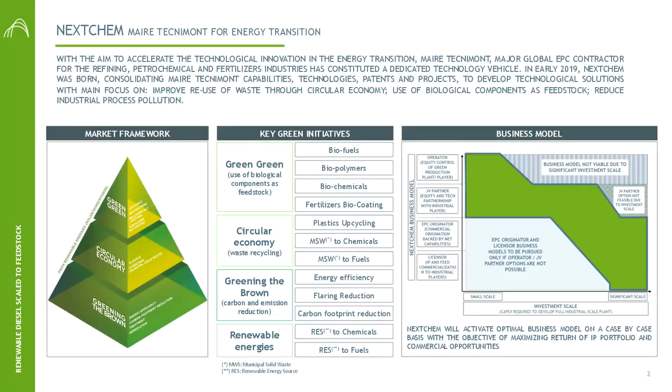The second cluster is the circular economy. We have a technology solution for plastic recycling and municipal solid waste conversion to chemicals and fuels. The third cluster, concerning the discussion today, is focusing on creating value from biological feedstock. In this field, we have a solution in biofuel, and for sure, renewable diesel is the solution that we propose today to this audience. Maybe Adam, you will go ahead with presenting Saola and our partnership, please.

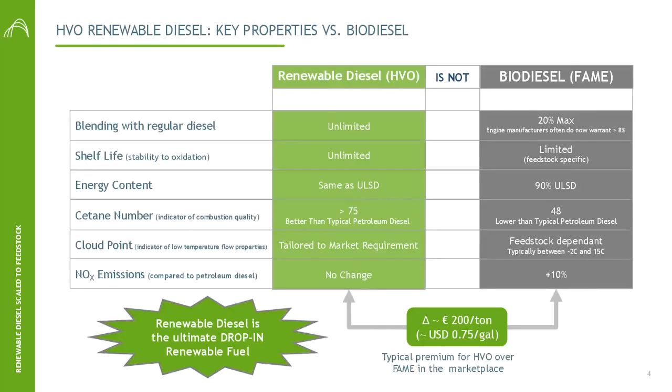In the U.S., there are programs that are supporting renewable diesel production, as well as other biofuels in general, but specifically renewable diesel has one of the lowest CI scores in the biofuels section for LCFS. We talked a little bit earlier about biodiesel versus renewable diesel. That gap can be up to $1 per gallon between the two fuels.

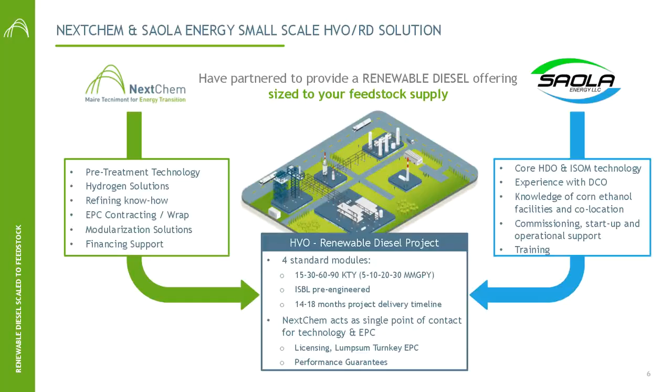NextChem provides some of their technology around pretreatment as well as SMR, and on the Saola side we provide more of the core HDO and ISOM technologies. With that combined under the NextChem umbrella for project delivery, we can offer customers an easy approach to execute a project, get off the ground and start generating revenue. With that said, Valerio will cover what makes our model work in the bioeconomy on the next slide.

Thank you, Adam. A lot of people in this webinar are used to thinking with an oil and gas mindset. And at the beginning, this business of renewable diesel has also been very much impacted by this, pass me the word, old approach.

In fact, all of us who worked in the petrochemical field before have experienced the fact that large-scale facilities enjoy better economics. The capital cost per installed ton is lower. When you ask your supplier for more feedstock, normally you receive a better price. But this is not the case when you are working in the biofield.

In fact, when you want to aggregate biofeedstock, you are suffering this diseconomy of supply. So basically, the more feedstock you want, the more you need to collect from a large area, a large geography. Cost of logistics impacts drastically the economics of the project. So what we did, after having analyzed carefully these dynamics, is arrive at the conclusion that there is an optimum scale for implementing this technology.

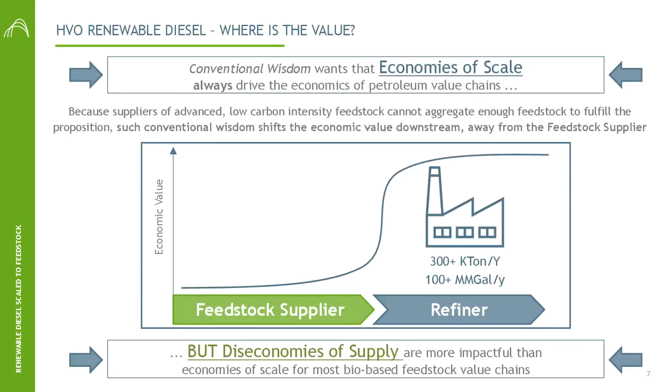If you may go, Jim, to the next slide. The reality is that by implementing this approach, we have feedstock costs that are drastically lower. In parallel, and this is also thanks to the strong coordination and activities that Saola and NextChem made together, we enter into the market with a modularized, standardized solution. This gives us the possibility to enjoy both an efficient feedstock approach, with also a very reduced capital cost because our technology is deployed in a very efficient solution that is the

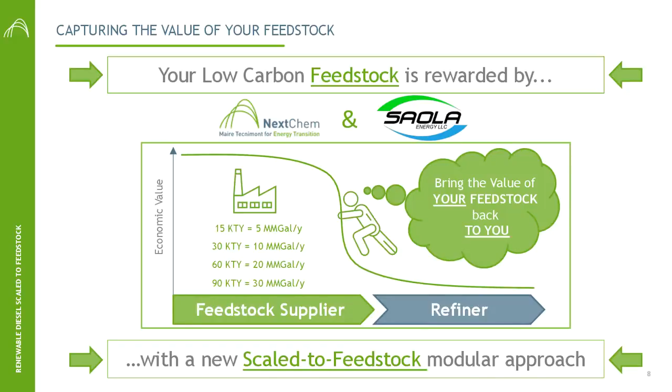modularized and standardized approach. In parallel, thanks to the fact that we can work with a lower amount of feedstock, we select the feedstock in order to have advanced feedstock at the inlet of our technology, and this gives us the possibility to have a very low carbon intensity on our final product. Please, Jim, if you may go to the next slide.

This is summarized at the end with this list of feedstock that we may utilize in our technology. For sure, we go to feedstock that are classified as second generation, following the RED 2, or advanced, following the classification in the United States. In parallel, our technology, thanks to the fact that we have a very efficient approach for the pre-treatment of the raw material, gives us the possibility to have a quite wide blend of product. So we are extremely flexible in terms of selection of the raw material.

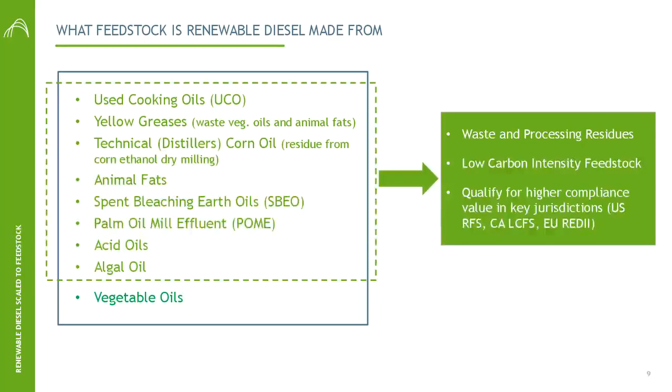And also our pre-treatment technology gives us the possibility to have a very low demand in terms of hydrogen. And this for sure is helping in optimizing the economics of our plant. This technology for sure has been deployed. So this technology exists on the ground, it's not just an idea that we have in our minds. And in this regard, maybe we can go to the next slide. I may introduce you briefly to the very high level process flow diagram.

So basically, as all the hydrotreating technologies, it is composed by a reaction block that is a hydrotreating reaction, followed by an isomerization, and then at the end by a fractionation, where we produce the product that we want to implement into the market. The feedstock is pre-treated, as I mentioned before, in order to make it ready for the reaction. And then as chemical, we introduce in the system the hydrogen, that is the molecule that helps us in hydrotreating the vegetable oil and in producing the renewable diesel.

I would also highlight a very distinctive point of our technology. Our technology is a swinging technology between renewable diesel and sustainable aviation fuel. So we have the possibility, in implementing the NextChem Saola technology, to provide to our client an installation that may produce renewable diesel or jet fuel in a campaign mode. This is quite different from the situation right now, where sustainable aviation fuel in the large scale facilities is just a byproduct of the reaction. In our case, we may operate the plant in order to make the sustainable aviation fuel the main product of our plant.

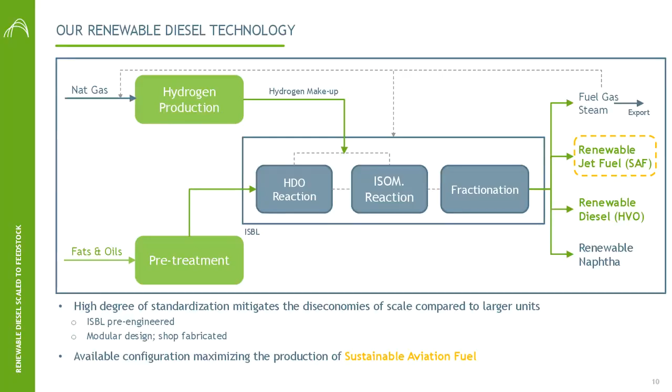Sorry about that. I was muted. I forgot about that. So with that said, thanks, Valerio.

The facility that Valerio was mentioning is the one in Garnett, Kansas. So a little bit about this facility. It is co-located with a 50 million gallons a year corn ethanol plant, and it essentially uses the corn oil from the ethanol plant and then imports some additional corn oil for the additional needs that they have. It is the first of its kind bolt-on to be completely integrated with an ethanol plant. So the site has been operational for a while.

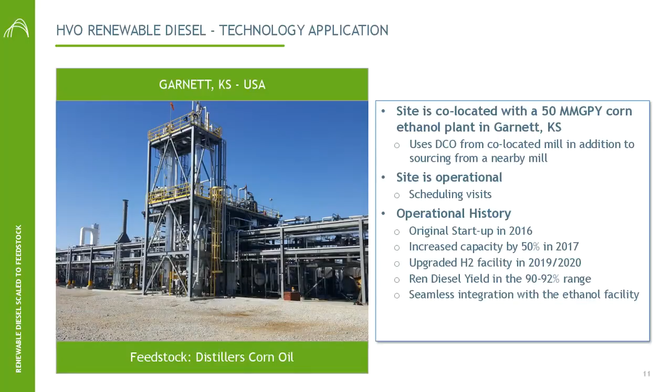We are currently scheduling visits. Here, Jim, we have that video that showcases and gives a little bit more information about the Garnett plant. So if you don't mind, can you play that video, please?

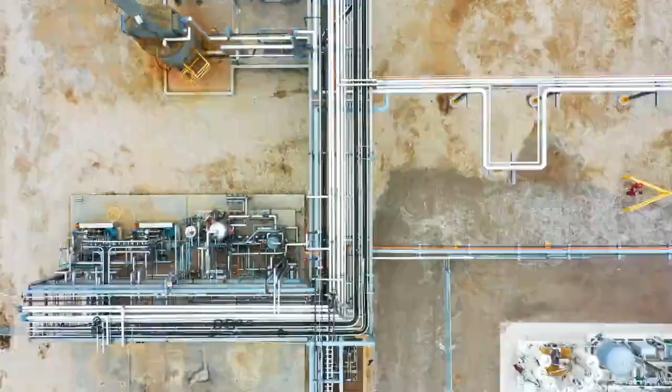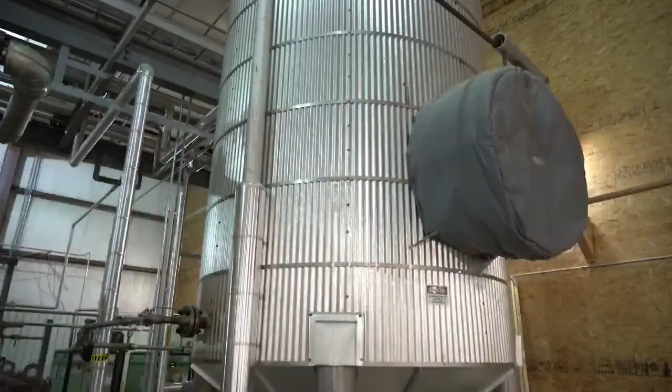So renewable diesel is made with residual fats and vegetable oils. Pretreatment is the first step at a renewable diesel facility. In this step, the contaminants that are in the fats, oils, and greases are removed in order to protect the downstream equipment and mainly to protect the hydrotreating catalyst.

Hydrodeoxygenation, or HDO, is the main process at a renewable diesel facility. This is where the renewable diesel is produced from oils and residual fats. The next step is isomerization. In the isom reactor, the cold flow properties of the renewable diesel are improved.

The next step is the fractionator. The fractionator is the distillation column for the process. This is where fuel gas is the overhead gas stream. The next product is renewable naphtha, which is a liquid overhead stream, and then obviously the main product is renewable diesel, which is the bottom stream. This is a sample of the renewable diesel product.

Our technology can be scaled to match the supply chain of our customer, allowing them to fully capture the real market value of their feedstock. NextChem makes available to the market this technology, the project development support, engineering, procurement, and construction services, as well as training services to ensure the successful deployment of the technology on a worldwide basis.

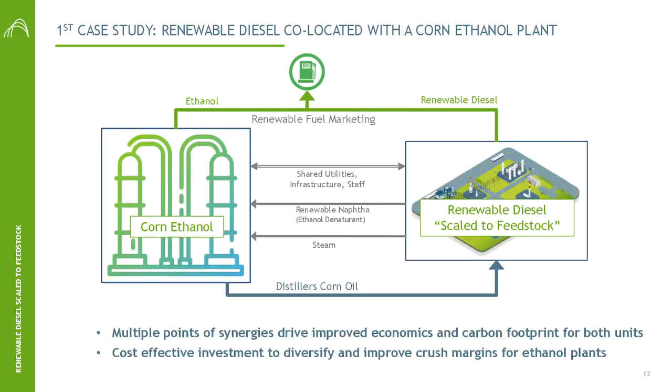So what does that mean for an ethanol plant? The ethanol field has had a couple of recent years with very small, if not negative, margins depending on the month. And I think, with us being kind of embedded with our clients in the ethanol industry, we understand the struggle that they deal with, and this is why we broached the subject of adding renewable diesel as a revenue diversification subject that they should absolutely look into to help them in the long term. So diversifying revenue streams will be critical for the long-term success of ethanol plants, and adding a renewable diesel plant will accomplish that goal.

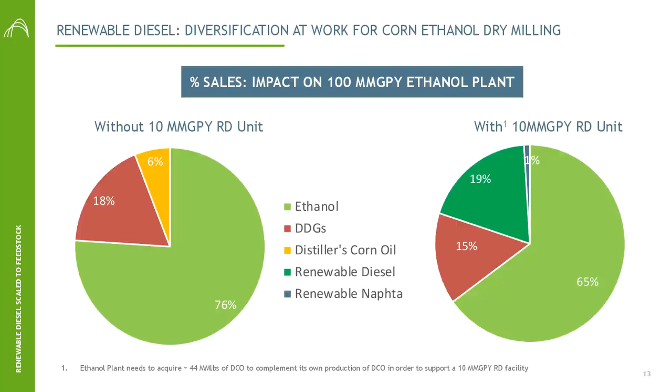The biorefinery of the future is going to have to break up what I call a piece of pie, from relying mostly on ethanol to having more pieces and diversifying, so that they are able to be as competitive as possible. And again, this shows the impact of adding a renewable diesel plant to an ethanol plant. Essentially, you're replacing your distillers corn oil piece with the renewable diesel piece, and then you're not relying as much on your ethanol sales for revenues.

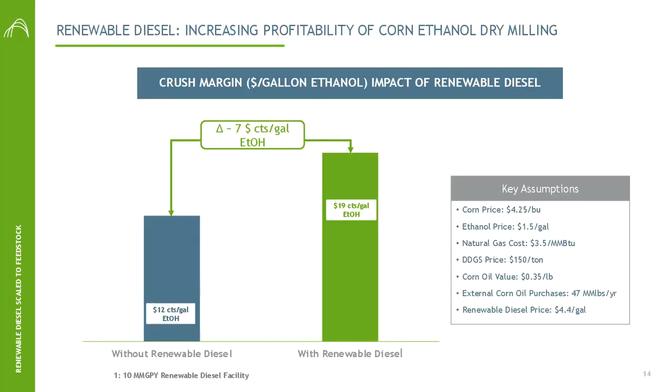Distillers corn oil in this case is an interesting fact because of its low CI score, which we're going to talk about in the next slide here. And this is using the LCFS in California as an example, but then again, most programs have a similar approach to the CI score. So in this case, renewable diesel coming from distillers corn oil is around a 32 CI starting point. Even at our lower scale, we're able to maintain that CI score because of how well we integrate with the host plant, which is the ethanol plant in this case.

As you know, the CI is impacted by a lot of things, including transportation, electrical mix, things like that. When you're co-locating with an ethanol plant, you're essentially reducing a lot of those additional potential negative CI hits on your plant. So that's one way to make sure that you have one of the lowest CI scores for your renewable diesel.

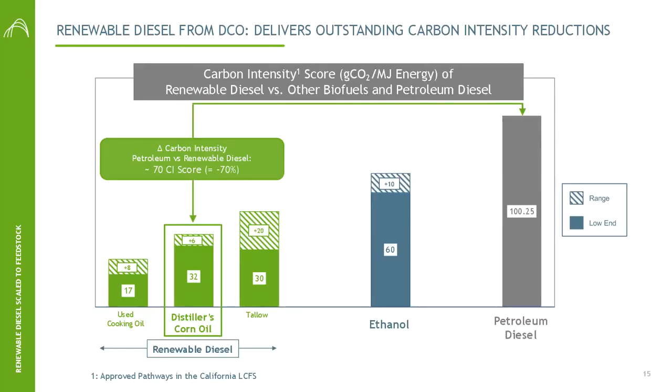Obviously, we can use other fats and oils, and here we're showing what used cooking oil and what tallow is, for example. But our focus is, specifically for ethanol plants, reducing the CI for renewable diesel coming out of distillers corn oil. Another way to improve on these CI scores is the use of green hydrogen, which Valerio will be covering on this next slide.

Thank you, Adam. Thank you very much. So we are arriving at the second case study that we would like to present to you. We discussed the feedstock, so the flexibility on the feedstock. We discussed the fact that our technology is modularized, so well optimized for reducing the capital cost and also optimizing the operating cost of the technology.

As we were talking about before, hydrogen is an important component for transforming the fatty acid, so the oil, the tallow, into renewable diesel or sustainable aviation fuel. In the large majority of projects that we are implementing, this hydrogen is produced from standard fossil fuel, so basically from natural gas via steam methane reforming.

By the way, we are developing a very interesting project in the United States, actually in Texas, where a very important company in the field of green power generation, Enel, which owns one of the largest solar plants, about 500 megawatts in the south part of Texas, wants to produce some green hydrogen. The point is that the green hydrogen then needs a utilization.

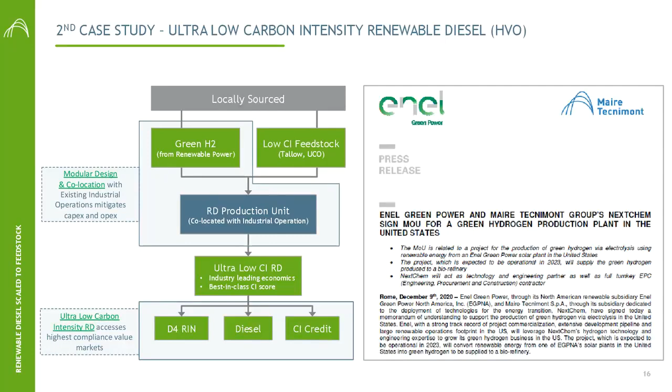So if we go to the next slide, what has been the role of NextChem? The role of NextChem in this project has been a business accelerator, because we maximize the value for the green hydrogen producer and also the value for the renewable diesel producer by putting together two projects that would seem separate, but in reality there is a strong synergy. We act as project development because we put those two clients in contact.

And then, thanks to the great alliance that we have with Saola, but also thanks to the important alliance that we have in the field of the electrolyzer, we give our client best-in-class technologies in order to convert renewable energy into hydrogen and then tallow into renewable diesel. So basically, as we like to say, we are putting together all the elements, connecting the dots in order to implement the best-in-class solution.

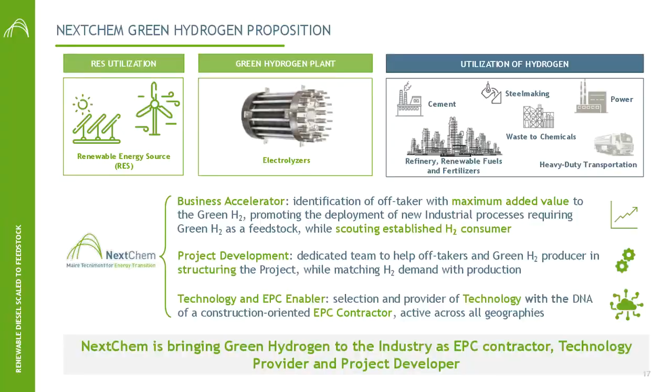Please, Jim, if we go to the next slide, the scheme of the project is extremely simple. For the green hydrogen, we utilize only water and renewable energy. Actually, this renewable energy is very low cost for two reasons. First of all, because the plant in Texas enjoys a very sunny geography, so the production of this solar facility is very high in terms of hours per year. But also, and this is very important to note, before the green hydrogen plant, a portion of the energy generated by the solar plant during the peak hours was not utilized.

The electrical system was not able to take this peak of production from the solar plant, and so this energy was lost. By putting in this green hydrogen plant, the target is to utilize those peaks that basically are neutral in terms of cost, and then produce green hydrogen.

Then the green hydrogen is transported only 50 miles to the HVO plant. We put in place a very efficient logistics chain in order to transport this hydrogen. And then in the HVO plant the reaction happens, and we produce renewable diesel from that.

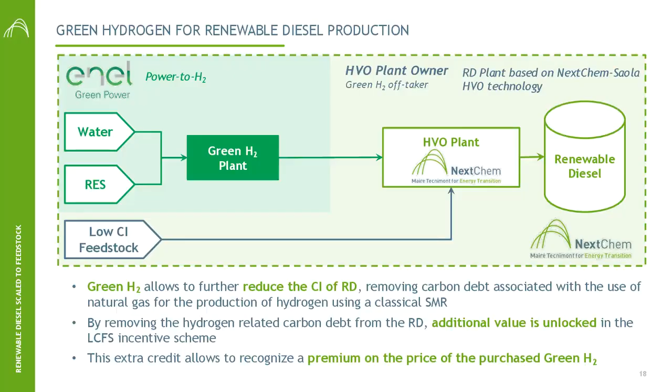If we go to the next slide, we can see the level of carbon intensity that we are decreasing. Before, Adam was introducing the carbon intensity we have for renewable diesel coming from DCO, distilled corn oil, utilizing SMR hydrogen, steam methane reforming hydrogen. In this case, with green hydrogen, we enjoy an additional reduction. We estimate it at an additional 8 points of reduction.

And this gives us the possibility to market, we guess, the lowest carbon fuel in the market. Consider that this lower carbon intensity adds an additional 25 cents per gallon of renewable diesel. I think we have introduced our technology and our value proposition, tailored for, as we say, bringing back the value to the feedstock.

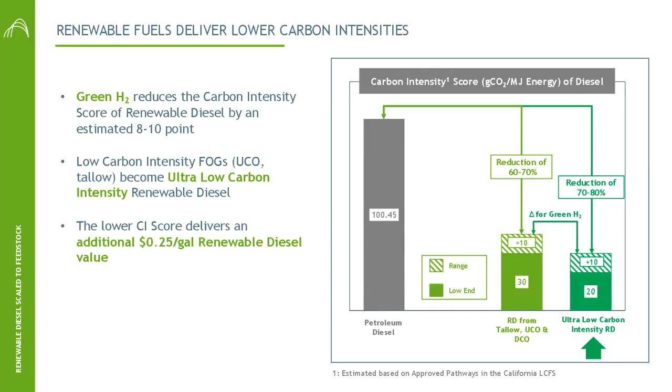We highlighted the reasoning behind this approach that we have in the market, and also some case studies that may be duplicated in other geographies with our technology and with our approach. So I guess, Jim, that we are on time for passing to the questions.